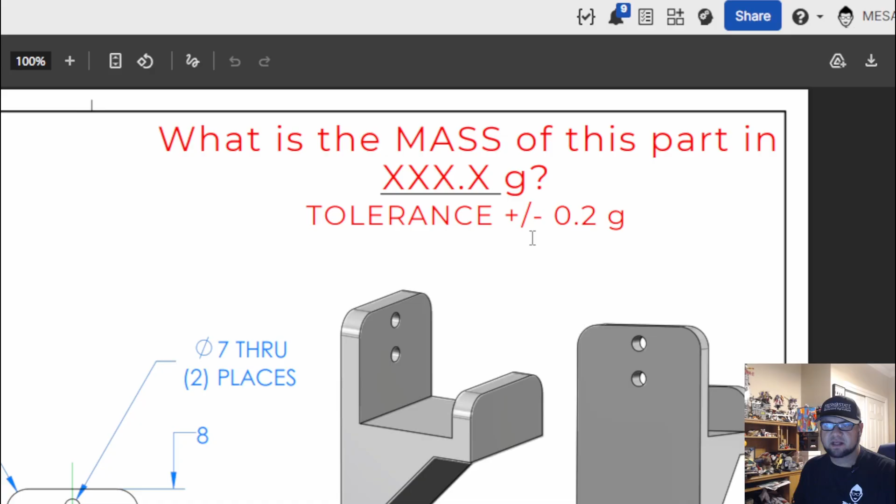All right, so if you take a look, we will be drawing in millimeters and grams, so be sure to change your units, and I'll do that with you guys on screen. We are going to be making this thing out of ABS. Like I said, it is 3D printable. This is our overall shape, and this is our tolerance. So what is the mass of this part in xxx.x grams, with a tolerance of plus or minus 0.2 grams, which is a pretty decent size window. But let's take a look.

So if we analyze our part, it's the same structure all the way through, a couple of fillets, 4 fillets on the corners, and 2 holes to mount it to the wall. So we're going to draw this whole shape right here, and basically I'm going to do it all with lines. I mean, I could probably do it with some rectangles and stuff, but I think it's going to take longer than it would be to just draw it with lines.

A couple of ways of thinking about doing this is drawing all the lines and then editing the dimensions afterwards. But I know when I do that, sometimes I get caught up and end up tripping stuff up, and then it messes up with what I'm trying to do. So I'll do a line and then dimension it, line, dimension, line, dimension, because it pops up with that window anyways.

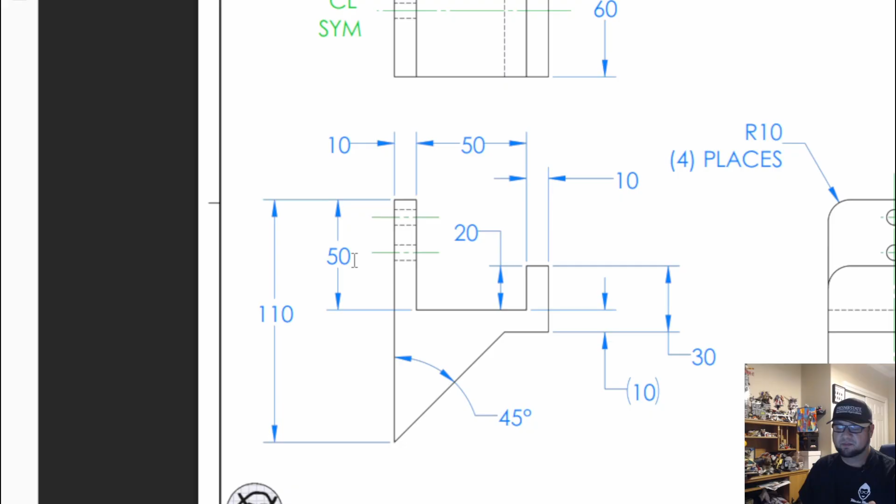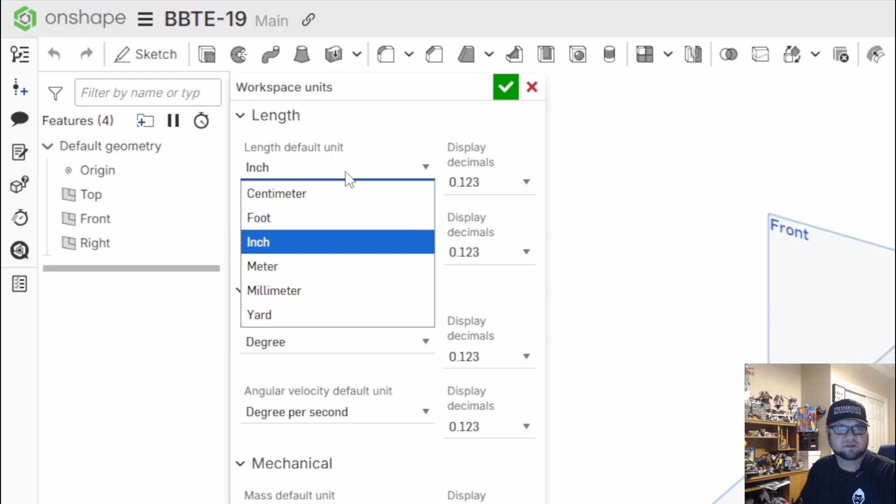So it's going to help us, and then we will extrude it to that 60 millimeter thickness. Come in, we'll round our corners, and then we will add our holes. So let's jump on over into Onshape and we will get started. All right, once we are in Onshape, first thing you're going to want to do is select your units. So we'll come up here, workspace units. We're going to change from inches to millimeters, and down here from pounds to grams.

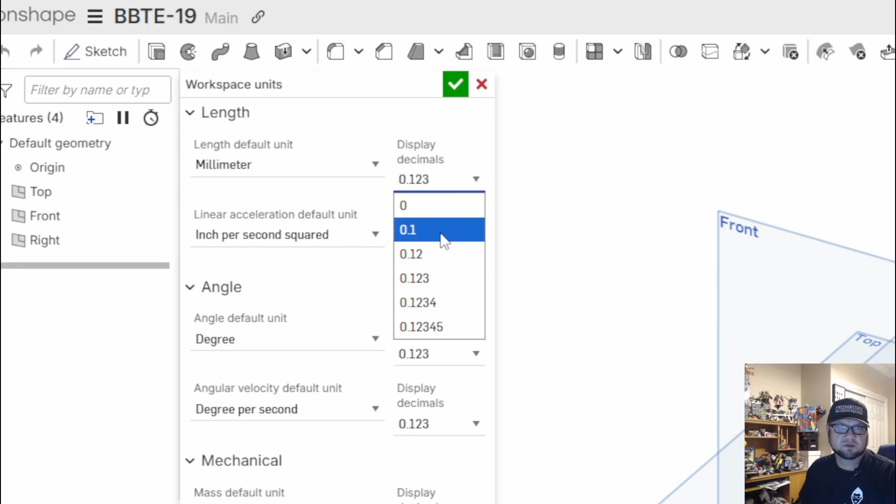Another thing you can do is you can change your decimal display. For us today, our tolerance is plus or minus 0.2, so we can go down one single decimal if we wanted to, as well as how it's going to display, but not really necessary. So next thing, we'll start our sketch. So I can click up here and then select my front plane. Shift and S will also start that sketch for you, but N is going to normalize that view, and P will hide those planes.

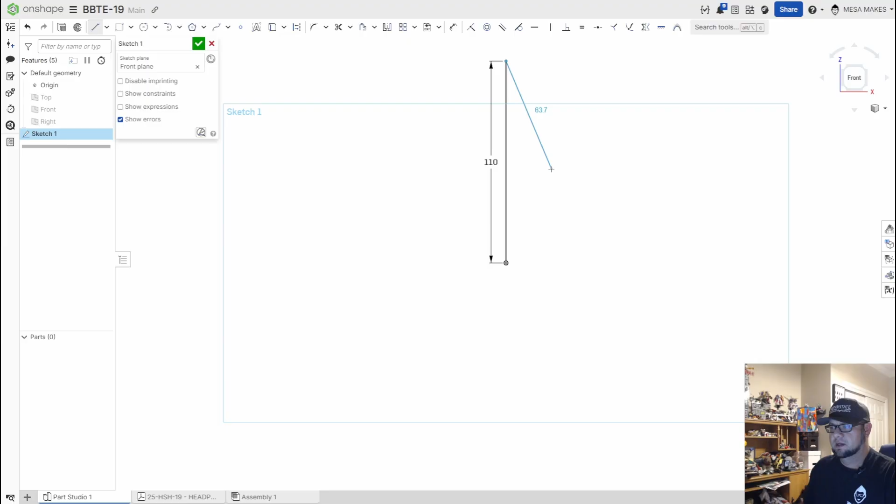So first thing I want to do is draw a line from this origin up 110. Remember, we are going to draw and then dimension, line, dimension, line, dimension. So I'm going to zoom in a little bit so we can see this a little bit better. Over 10, down 50, over 50 as well, up 20, over 10, down 30.

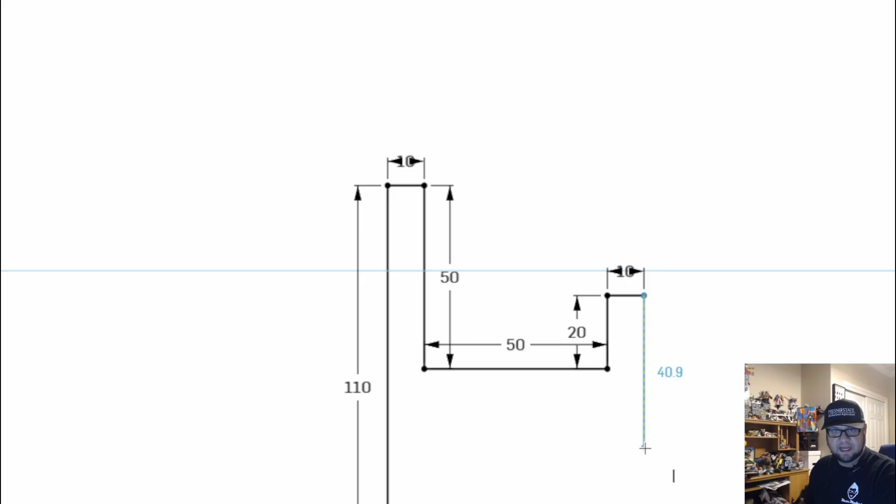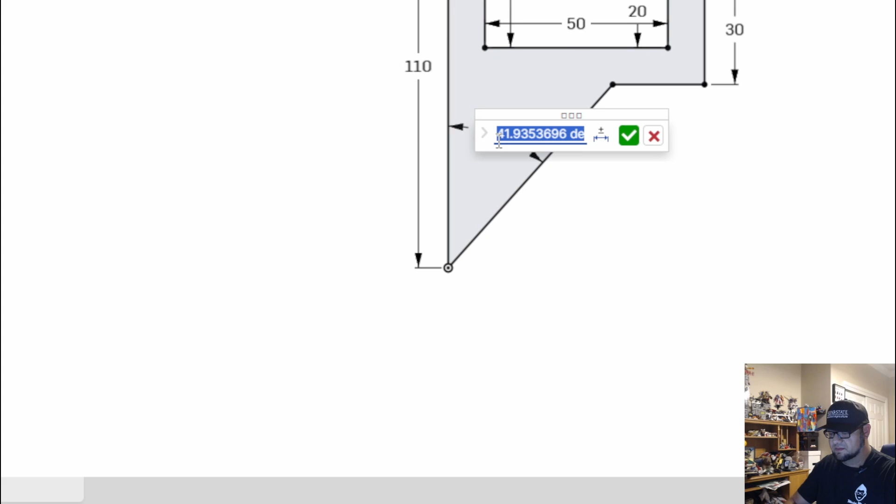Over. Now this is where things get a little tricky. We didn't tell it how long here, and it's not on the measurement, but if I go over and then I come down here to my origin, and then I dimension from this line to this line so that has to be 45 degrees, you'll see that it doesn't matter how long this is because it's going to do it for us. Now we are fully defined, but in case you were curious, it's actually 20 millimeters there. So let's zoom out so we can see that full shape.

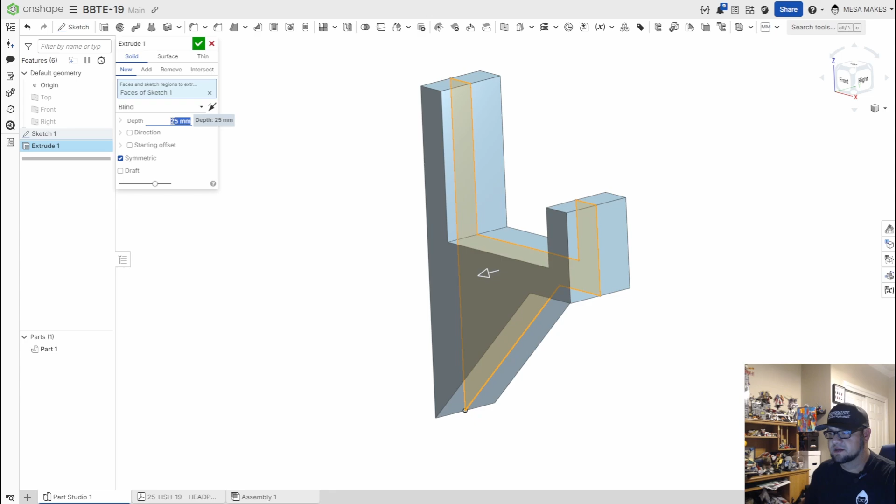There is our overall shape. Next thing we're going to do is extrude by pressing Shift and E, and we start to get our part. But what I want to do is make it symmetrical, and our depth needs to be 25 millimeters. So we'll say OK, and we'll accept it.

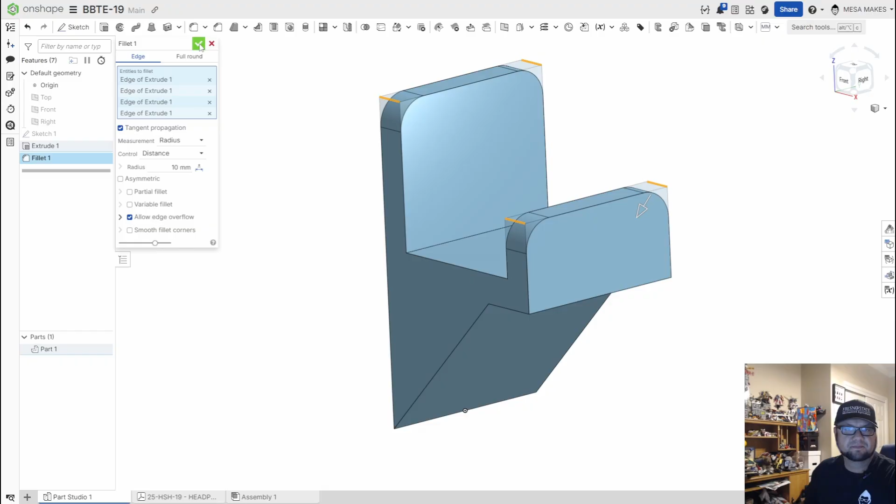Next thing we're going to do is Shift F for the fillet. I'm going to select these 4 corners right here. Boom, boom, and boom, with a radius of 10. And we'll say OK. So I have all of my radii done. Next, I'm going to select this face, Shift and S to start a sketch there.

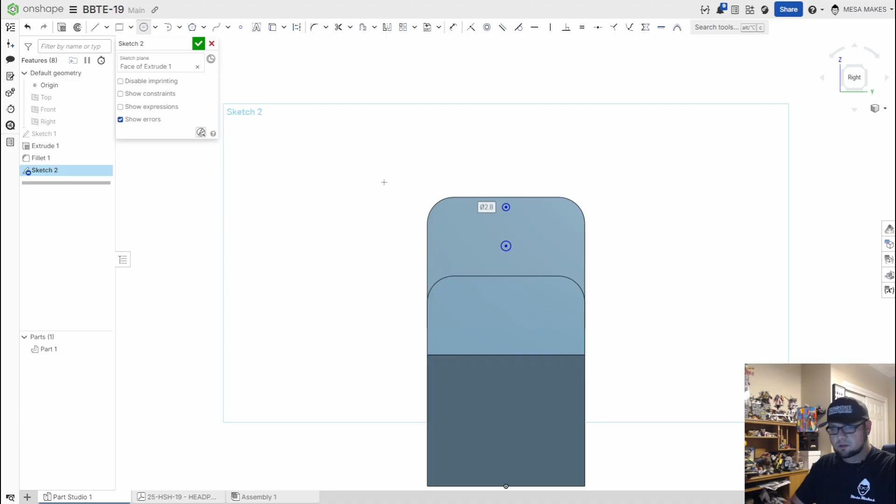And I'm going to draw 2 circles. So I'm going to draw one right here, and I'm not going to dimension it. I'm going to draw another one here, and I am going to dimension it. And for this one, it needs to be 7 millimeters. And both of them actually need to be 7. So what's cool is if I select both and press E, they are now equal to one another.

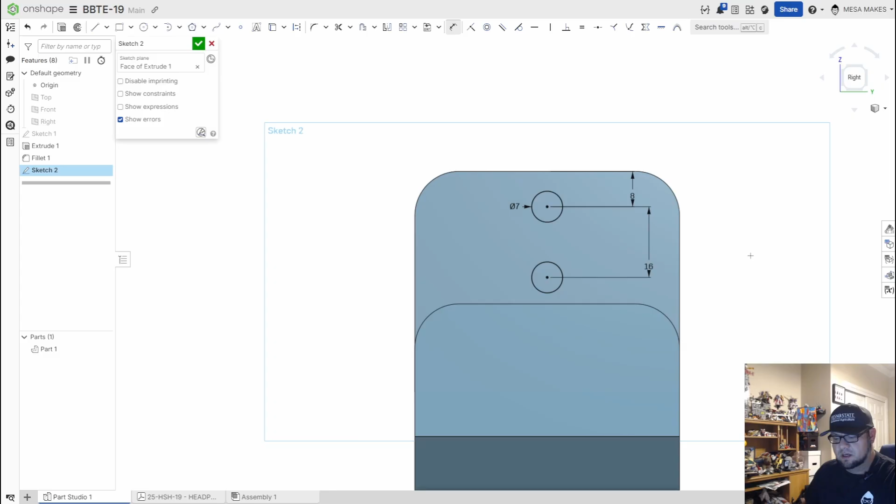So dimension, this one needs to be center to the top, needs to be 8 millimeters. And this one, center to center, needs to be 16 millimeters. Shift and E, we'll turn that into an extrude, but we'll do it as a remove. We'll say accept, and we have our finalized shape.

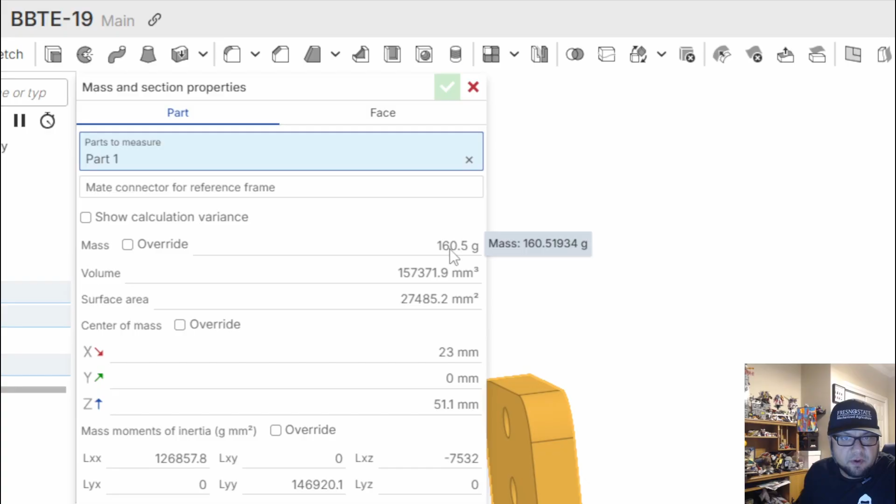So last thing, right click, assign material. We are going to be making this out of ABS from the custom materials library. Come down here to my weights. I end up with a mass of 160.5. If we look there and we hover over, 160.51934, which would round to 160.52.

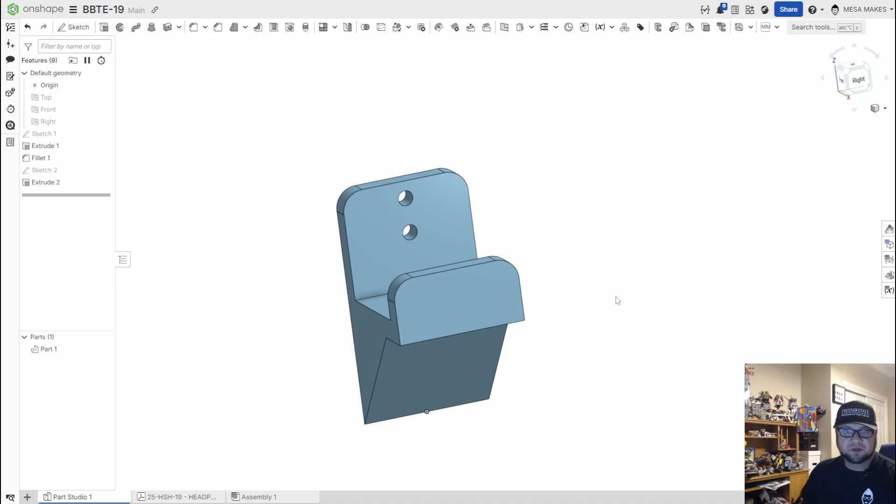160.5 is what our answer is going to be. And with a tolerance of plus or minus 0.2, you can do anything from 160.3 all the way up to 160.7, and that will suffice. So very, very cool little shape. Practical, useful. I think if I were to make this, I would probably add another fillet here,

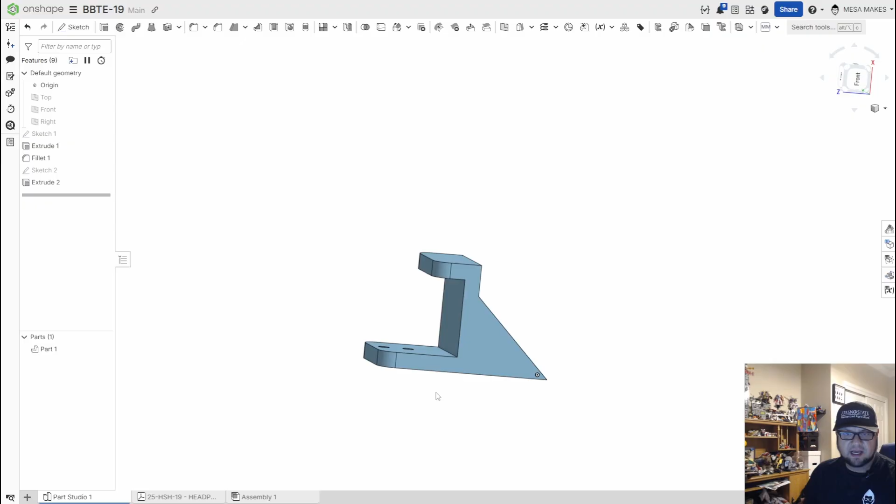and I would actually print this on its side like this for the best quality print. It might make your holes a little oblong. However, if we were to print this like such, now you have to have a lot of supports and overhangs or something to take care of that little overhang there. So however you want to do it, you guys know your printers better than I do. But from my experience, printing it kind of on its side like so.

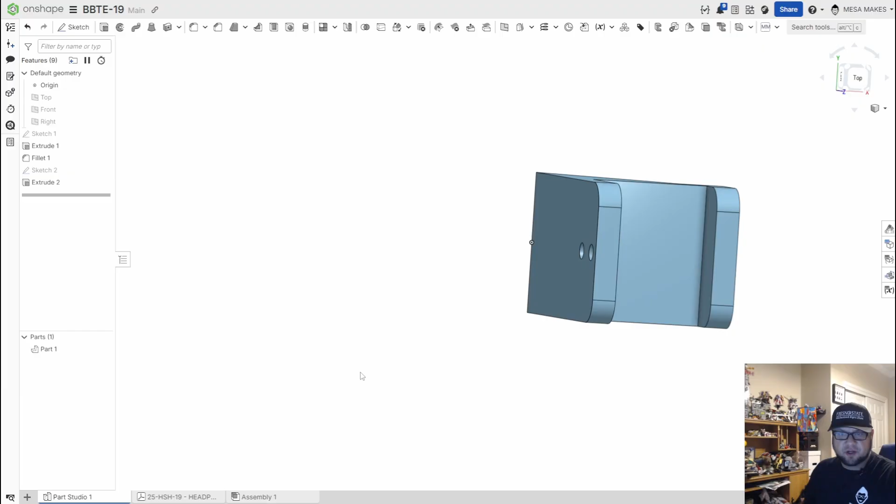Let's see if we can do this. Like that. Yeah, that would probably be the best bet in my mind to be able to make this guy. And then I would support those holes. Maybe make them a little oversized because this isn't a super big tolerance for a part. But pretty cool part all in all. So that's going to do it for us this week for this number 19, the headphone holder.